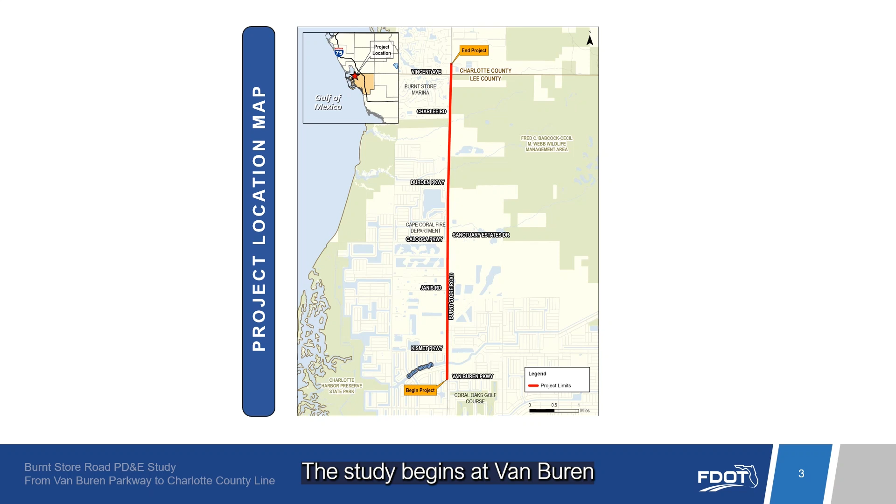The study begins at Van Buren Parkway and extends to the Charlotte County line. The study also includes a quarter mile section north of the Charlotte County line to connect to the existing 4-lane roadway. The total project length is approximately 5.7 miles.

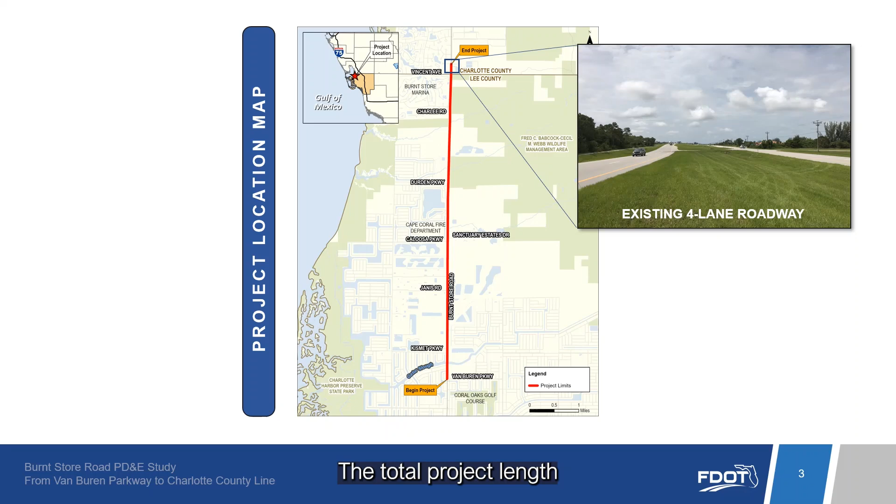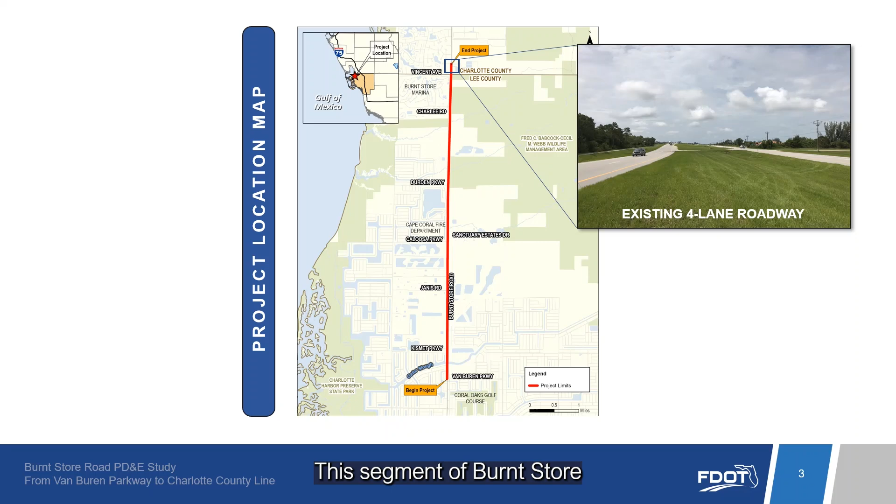A portion of the roadway is within the city of Cape Coral, while the remainder is located within unincorporated Lee County. The department proposes to widen Burnt Store Road from 2 to 4 lanes, with future accommodation of 6 lanes. This segment of Burnt Store Road is the last remaining 2-lane unimproved segment of the roadway's 18-mile length from Pine Island Road to US 41.

Burnt Store Road, also known as County Road 765, serves as an important north-south corridor for commuters, in addition to freight traffic, as it connects to regional transportation facilities. These include Interstate 75, US 41, and Pine Island Road. The corridor also provides access to several developments within Lee and Charlotte counties, including Burnt Store Marina.

Widening Burnt Store Road will address projected travel demand as a result of area-wide growth. In addition, the proposed widening and associated multimodal improvements will address safety concerns associated with the existing 2-lane roadway and enhance emergency evacuation for this designated hurricane evacuation route.

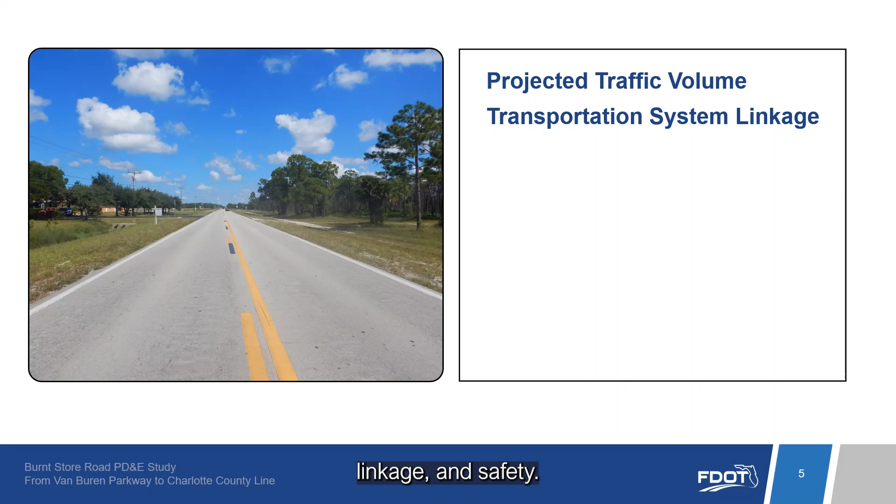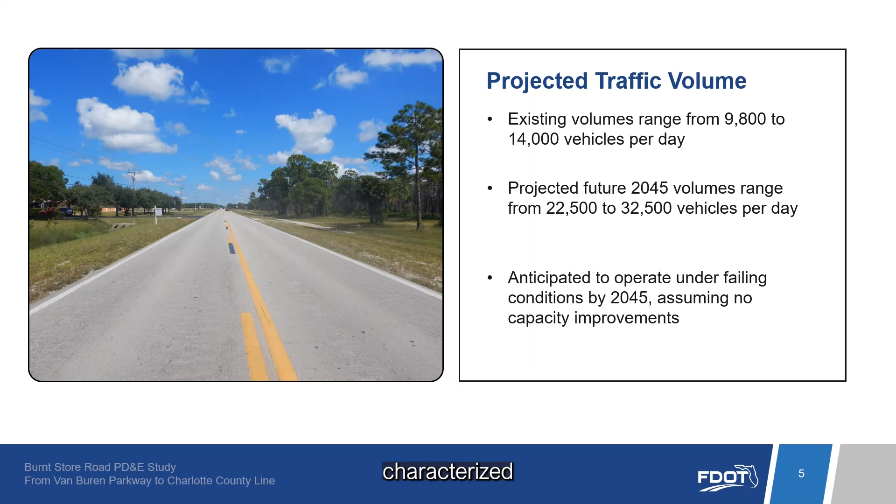The need for the proposed improvements for Burnt Store Road is based on traffic volume projections, transportation system linkage, and safety. Existing traffic volumes range from 9,800 to 14,000 vehicles per day. Based on anticipated growth within the corridor, projected future 2045 traffic volumes range from 22,500 to 32,500 vehicles per day. By the 2045 design year, if no roadway capacity improvements are made, the corridor is anticipated to operate at a level of service F. This signifies a failing condition characterized by high level of traffic congestion and delays.

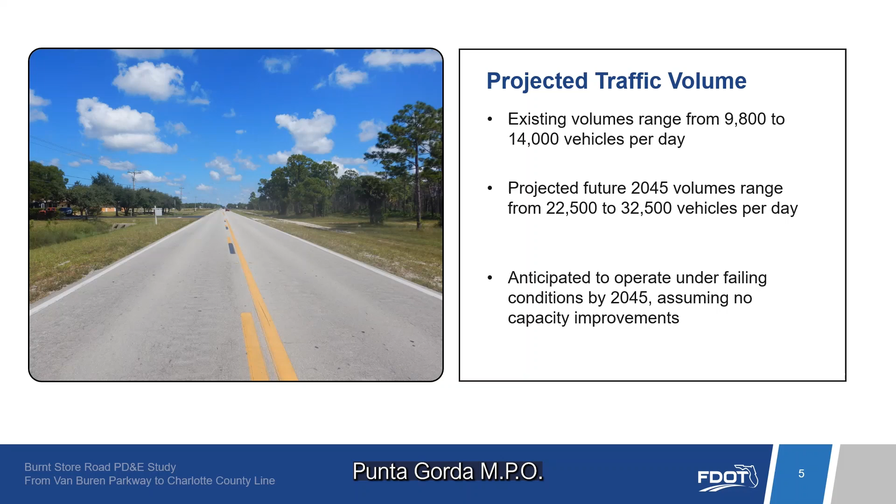At this time, this project is listed as cost feasible in 2031 to 2035 in the Lee County Metropolitan Planning Organization, or MPO 2045, Long-Range Transportation Plan, or LRTP. Similarly, the project from the Charlotte County line to Wallaby Lane in Charlotte County is listed as cost feasible in 2031 to 2035 in the Charlotte County Punta Gorda MPO 2045 LRTP.

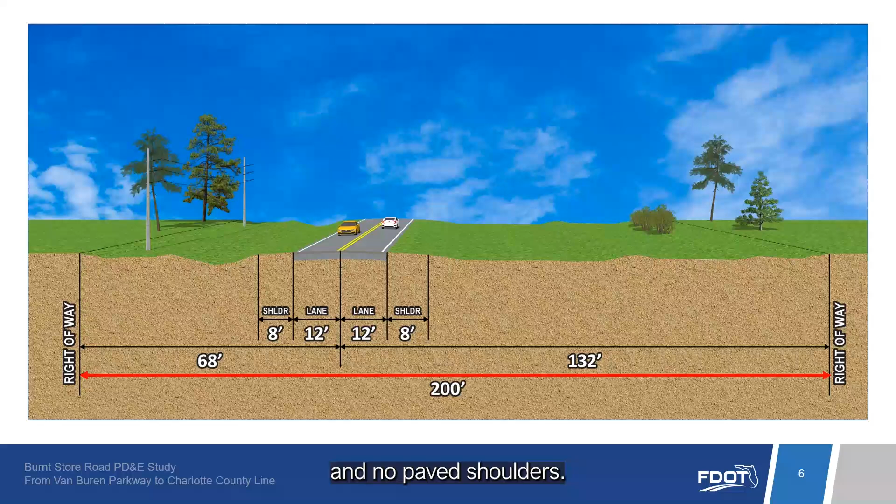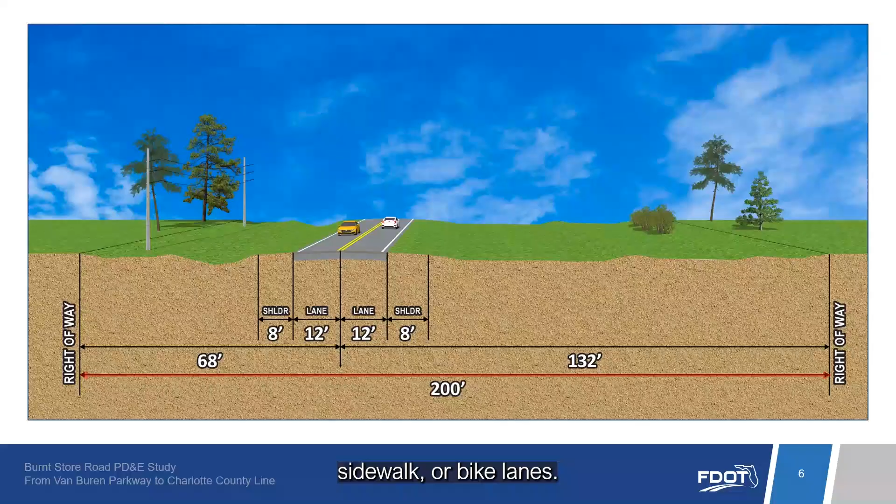Within the project limits, Burnt Store Road is a 2-lane undivided facility with 12-foot travel lanes, 1 in each direction, and no paved shoulders. There are no pedestrian or bicycle facilities within the project limits, with the exception of the south and north ends, where adjacent projects added some shared use path, sidewalk, or bike lanes. The posted speed limit is 55 miles per hour.

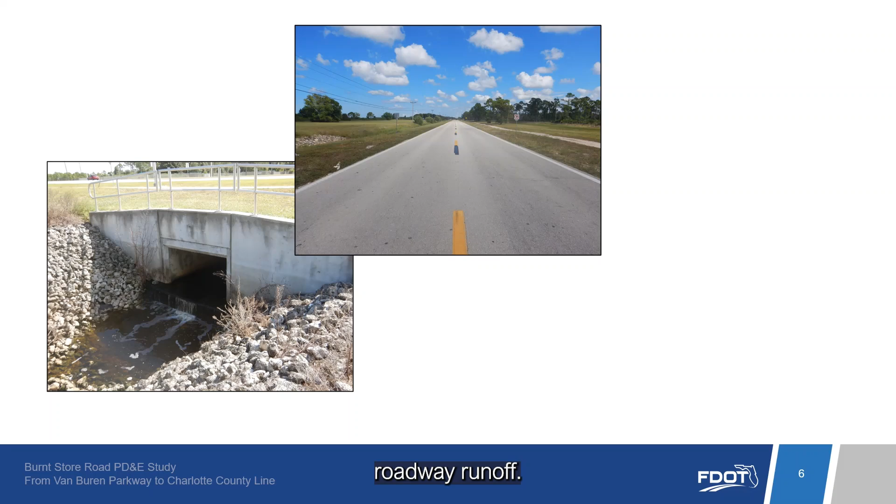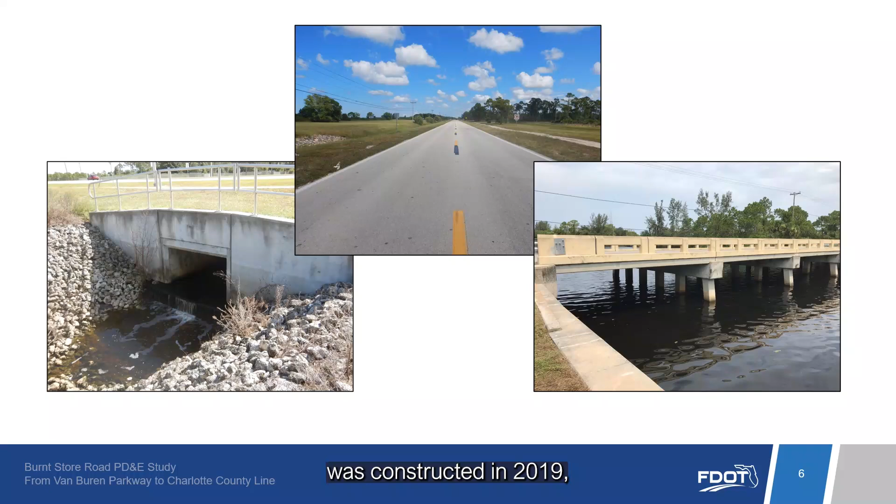Stormwater runoff is collected in roadside ditches and swales, and there are no existing stormwater management facilities to store and treat roadway runoff. There are 2 bridges over Gator Slough Canal. The existing southbound bridge originally carried both northbound and southbound traffic. A new northbound bridge was constructed in 2019, and the original bridge was transitioned to carry 2 lanes of southbound traffic. The southbound bridge has 2 11-foot travel lanes with 9-foot shoulders on each side.

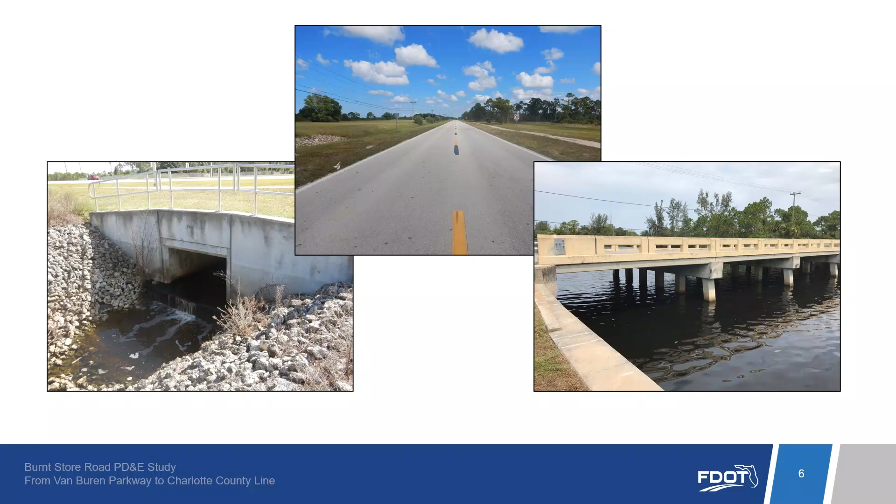Throughout this PD&E study process, FDOT has looked at many different concepts to widen Burnt Store Road from 2 to 4 lanes. After environmental and engineering analyses and public and agency comments, many of these alternatives were eliminated.

The last public meeting was an alternatives public workshop held on August 30th, 2022 for the in-person option, and on September 1st, 2022 for the virtual option. At that workshop, we asked for your input on proposed improvements to Burnt Store Road. Some of the feedback received included access management concerns and the restriction of northbound turning movements from Burnt Store Marina and Vincent Avenue in particular, access management at other existing project intersections, future development access, turn lanes, and environmental impacts.

Based on your comments and additional environmental and engineering analyses, a preferred alternative was selected for Burnt Store Road.

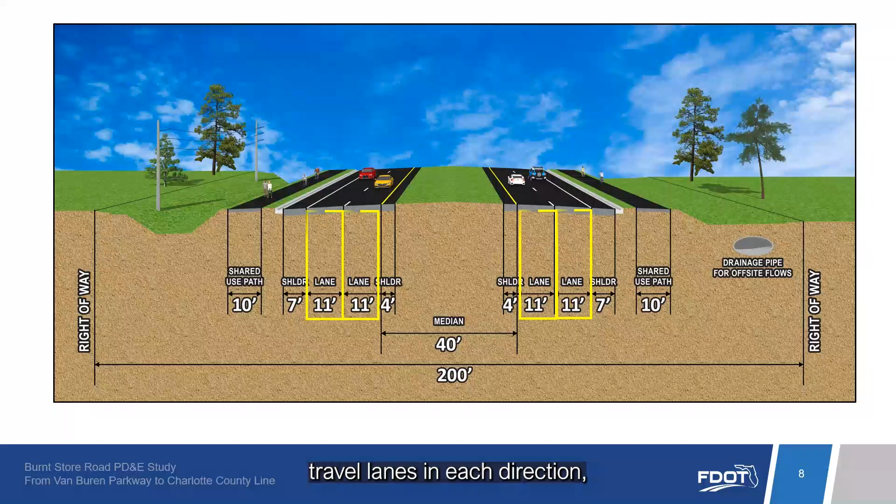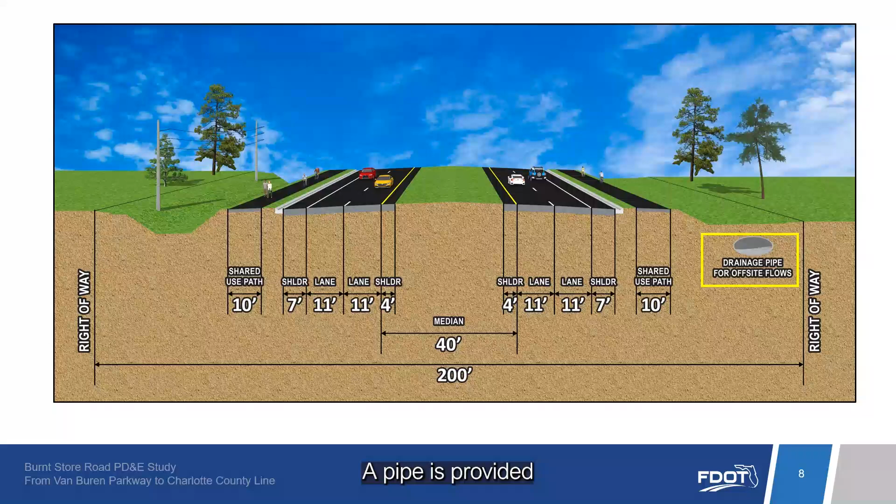The preferred alternative for Burnt Store Road results in 4 lanes with 2 11-foot travel lanes in each direction, as well as 4-foot paved inside shoulders, 7-foot paved outside shoulders, and a 40-foot grass median and 10-foot shared use paths on each side of the roadway. This alternative provides an urban typical section with curb and gutter and a closed roadway drainage system. A pipe is provided to capture offsite flows from the east and convey the water under the roadway.

This alternative nearly eliminates right-of-way impacts for the roadway alignment. One unavoidable roadway impact would occur at a utility parcel just north of the Lee County line. Right-of-way is also needed for the stormwater ponds and floodplain compensation areas.

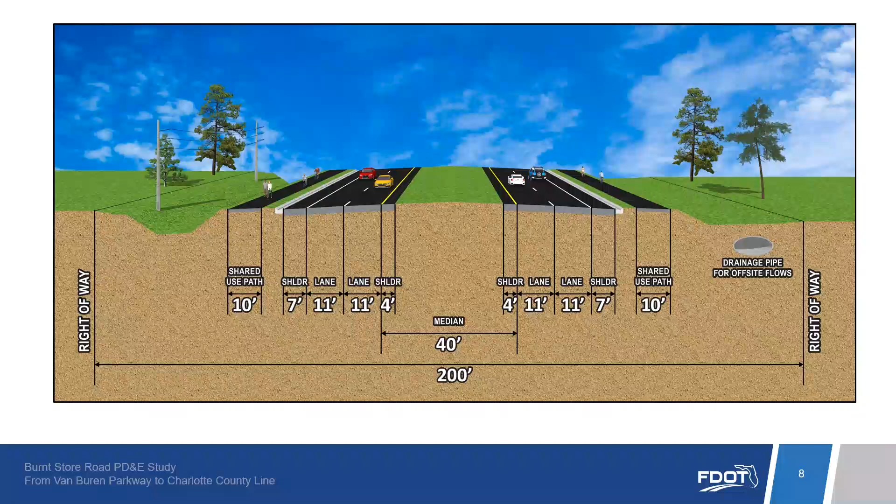Extensive engineering analysis was completed as well as coordination with Lee County, Charlotte County, and their MPOs regarding alternative intersection designs at Vincent Avenue. A continuous green T intersection was identified as the preferred intersection alternative in this location. This intersection type allows for eastbound traffic on Vincent Avenue to make a northbound, left-turning movement onto Burnt Store Road with signalization and a channelized lane to merge onto Burnt Store Road. A video further explaining how this intersection functions will play momentarily.

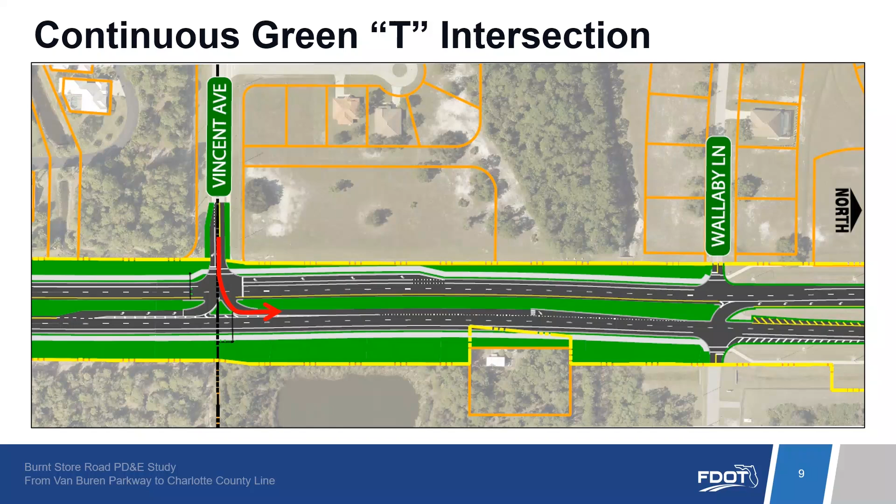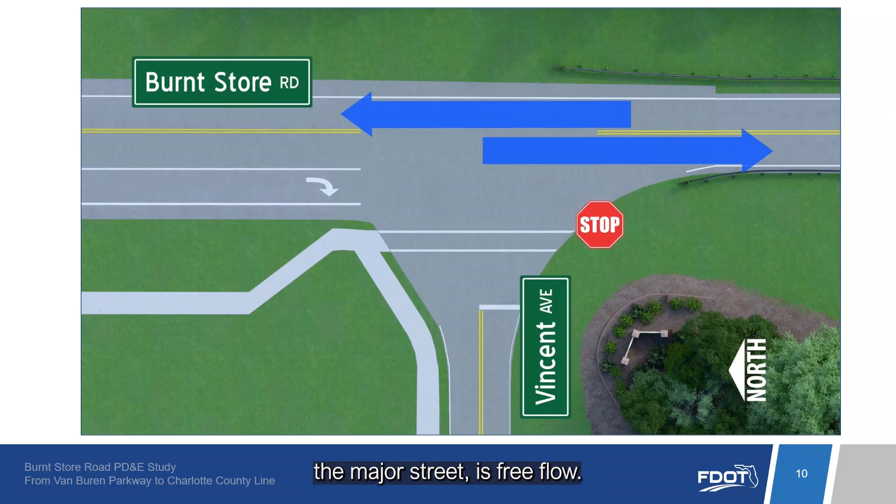The existing intersection at Burnt Store Road and Vincent Avenue is a 3-legged or T intersection. Vincent Avenue, the minor street, is controlled by a stop sign. Northbound and southbound traffic on Burnt Store Road, the major street, is free flow. Free flow conditions can create a lack of gaps in traffic needed for northbound traffic to turn left onto Vincent Avenue. In addition, the lack of left turn lanes, the presence of trucks and vehicles with trailers, and delays associated with turning vehicles create backups on both Burnt Store Road and Vincent Avenue. This also creates potential safety concerns.

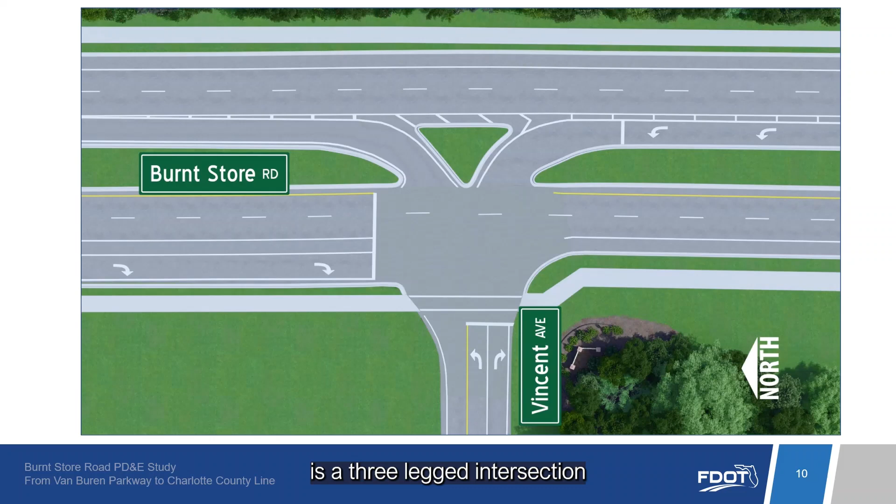The continuous green T intersection, or CGT, is a 3-legged intersection that allows one direction of travel on the major street to operate under free flow conditions. The opposite major street direction of travel and minor street approach are typically controlled by traffic signals.

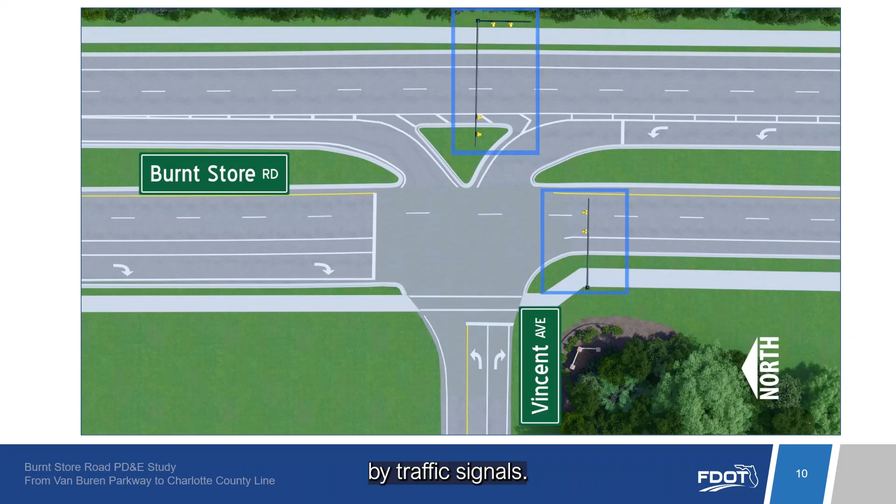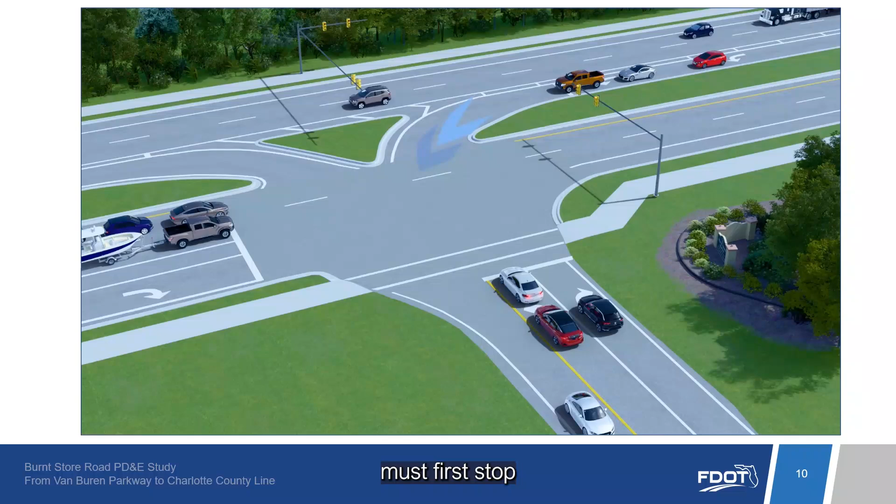Let's take a closer look at how a CGT would function for motorists at the intersection of Burnt Store Road and Vincent Avenue. On Burnt Store Road, northbound traffic would proceed through the Vincent Avenue intersection without stopping. Motorists who wish to turn left onto Vincent Avenue from this direction must first stop at the traffic signal before completing their movement. Southbound motorists on Burnt Store Road would have the options of proceeding straight as through traffic or turning right onto Vincent Avenue, just like at a conventional signalized T intersection.

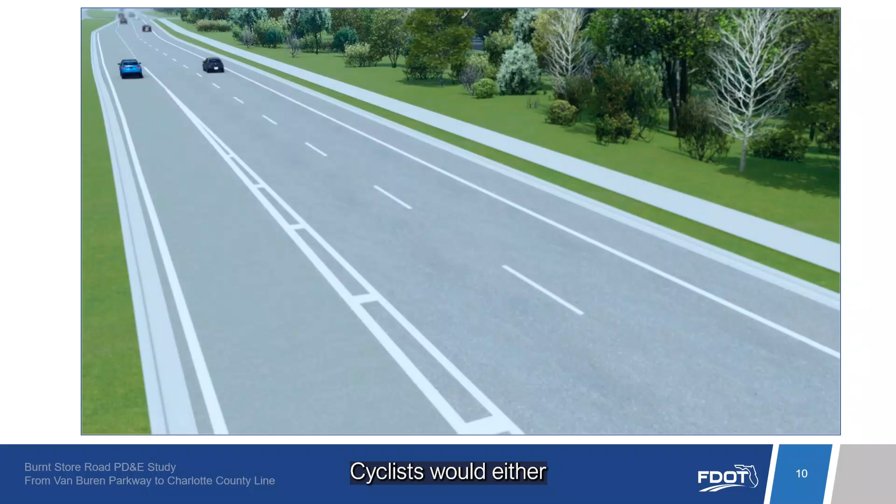From Vincent Avenue, motorists would use the right turn lane to proceed southbound on Burnt Store Road. To turn left onto Burnt Store Road, motorists would use the channelized lane on Burnt Store Road to merge after passing through the traffic signal. Cyclists would either navigate the intersection using crosswalks and pedestrian paths or could follow the same paths as vehicles. Pedestrians would use marked crosswalks to safely cross Vincent Avenue.

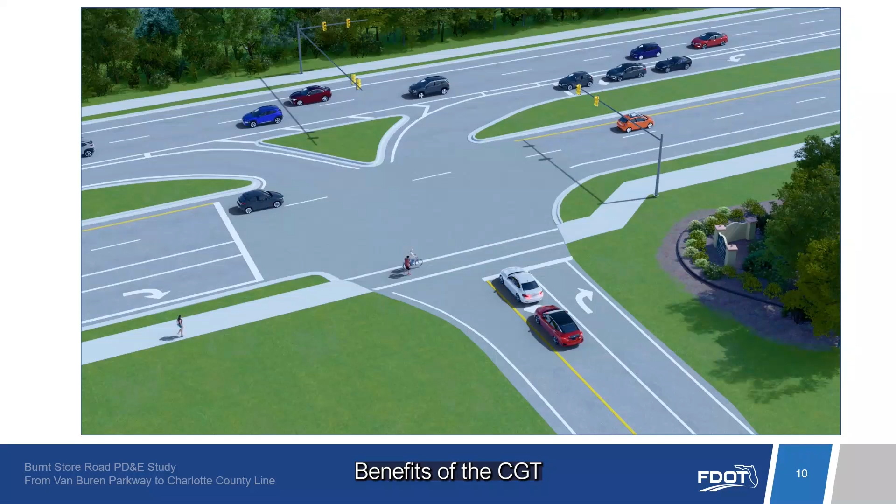Benefits of the CGT include improved efficiency and safety. The free flow of northbound traffic on Burnt Store Road allows more green light time to the other movements, reducing delay. Left-turning vehicles from Vincent Avenue would use a channelized receiving lane on Burnt Store Road to merge. The channelization of the left-turning vehicles from Vincent Avenue reduces the potential for angle crashes.

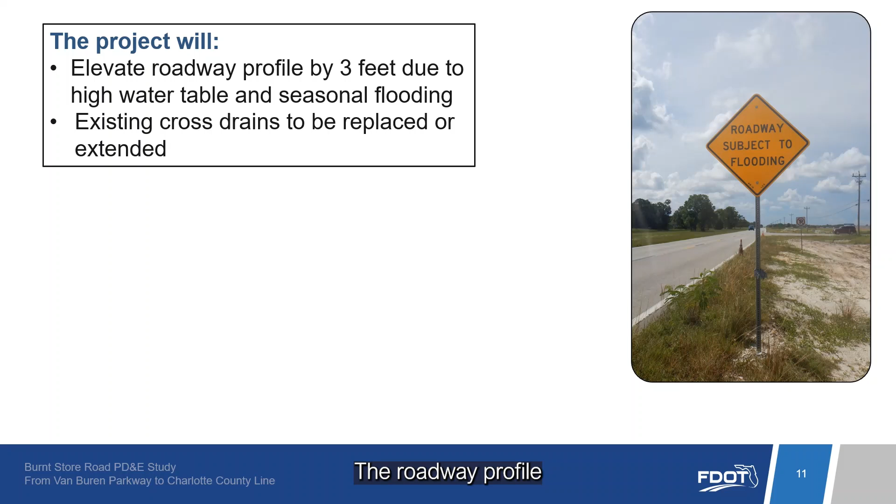The roadway profile will be elevated approximately 3 feet to account for the high water table in the area and a history of flooding events. The existing 9 cross drains, which include the bridge culvert over Yucca Pens Creek, will be extended or replaced. The culvert elevations and sizes will be appropriately designed to maintain the east to west hydrological flows of the area. A stormwater management system with stormwater ponds and floodplain compensation sites will be provided.

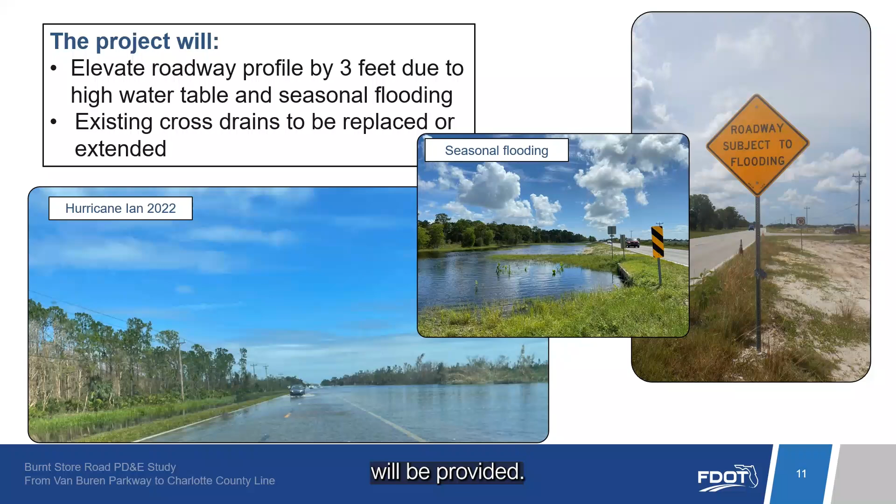This alternative also will replace the existing southbound bridge over Gator Slough Canal with a new bridge structure. The new bridge would be similar to the recently constructed northbound bridge with 11-foot travel lanes, 17-foot inside and 10-foot outside shoulders, and a 14-foot shared use path. The bridge will be of sufficient width to carry 3 lanes in the future.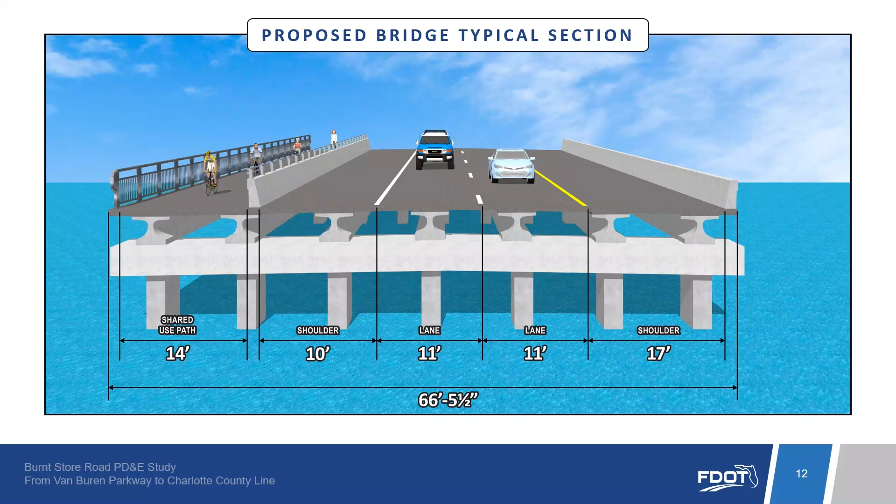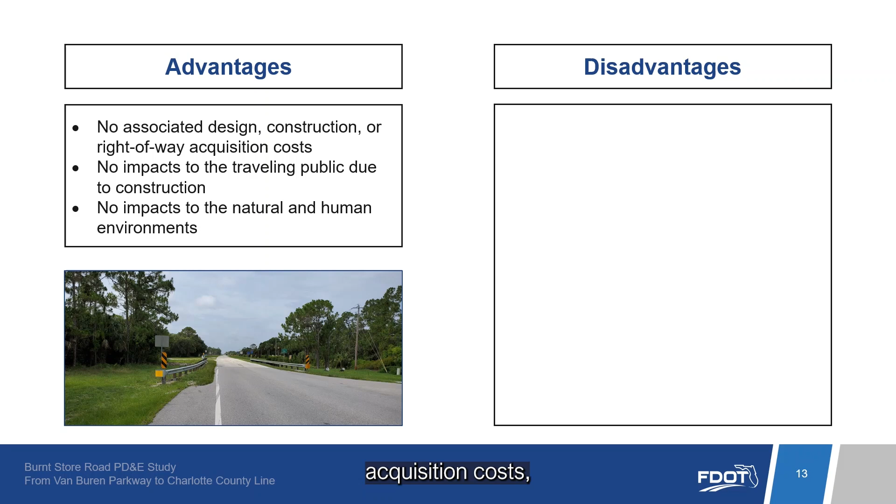Throughout this study, a no-build alternative is also considered. The no-build alternative assumes that no improvements are made to Burnt Store Road through the year 2045, except for routine maintenance. There are advantages and disadvantages to the no-build alternative. Advantages include no associated design, construction, or right-of-way acquisition costs, no impacts to the traveling public due to construction, and no impacts to the natural and human environments.

Disadvantages include inconsistency with the purpose and need for the project or with local transportation plans, lack of improved multimodal accommodations for bicycles and pedestrians, increased traffic congestion along the corridor, increased potential for crashes due to congestion and intersections, increased evacuation and emergency vehicle response times, and increased vehicle emission pollutants due to higher levels of traffic congestion. The no-build alternative remains a valid option and will continue to be evaluated until the completion of this study.

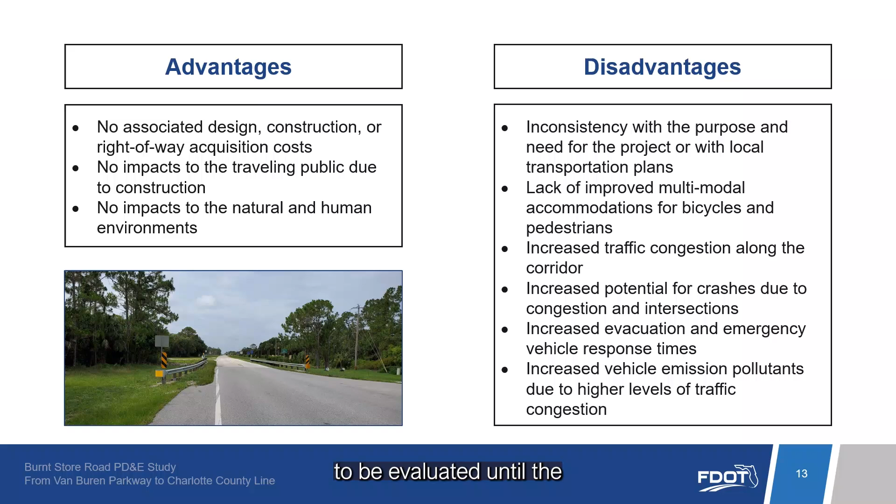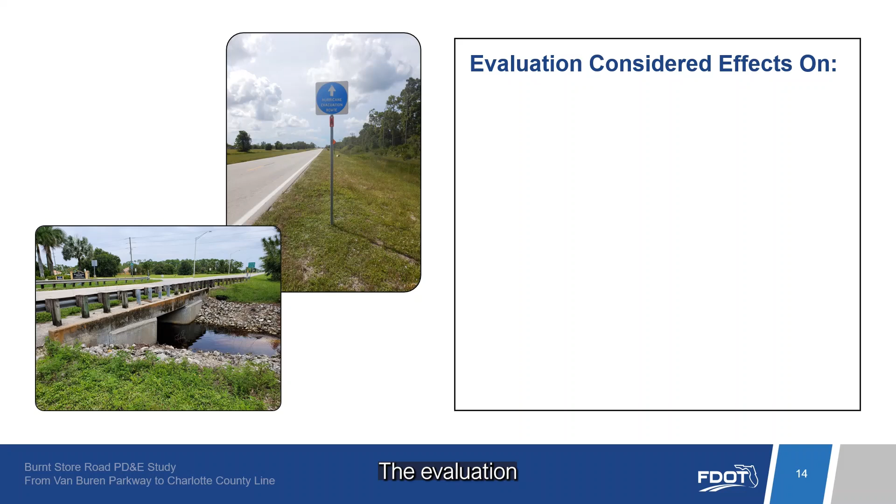FDOT evaluated environmental and socioeconomic factors relating to proposed widening improvements in accordance with the National Environmental Policy Act of 1969, as amended, and other federal requirements. The evaluation considered the effects of widening Burnt Store Road on protected species and habitat, wetlands and floodplains, water quality, stormwater management and permitting, air quality, right-of-way requirements and relocations, contamination, archaeological and historical resources, recreational sites, noise, and farmland.

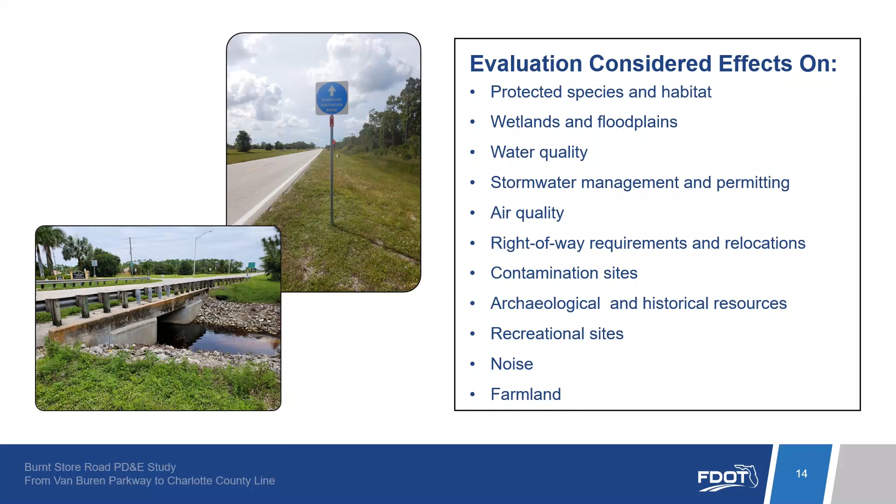Protected species and habitats are allowed special protection under the Endangered Species Act of 1973, as amended, and Florida statutes. FDOT assessed species within the project limits and, through ongoing coordination with the U.S. Fish and Wildlife Service, has determined that the proposed project may affect, but is not likely to adversely affect, the existence of certain federally listed threatened or endangered species.

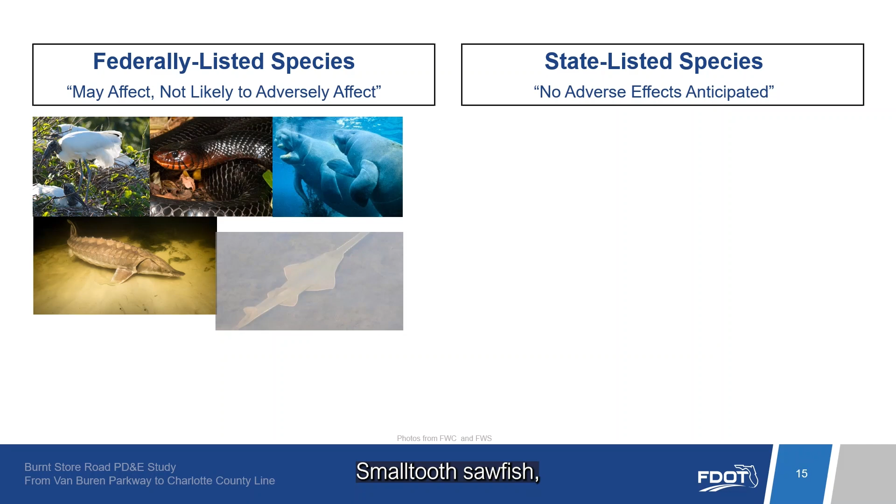The listed species include the wood stork, eastern indigo snake, West Indian manatee, Gulf sturgeon, small-tooth sawfish, and Florida bonneted bat. The FDOT also determined that the project will have no adverse modification or destruction of critical habitat for the small-tooth sawfish, West Indian manatee, and Florida bonneted bat.

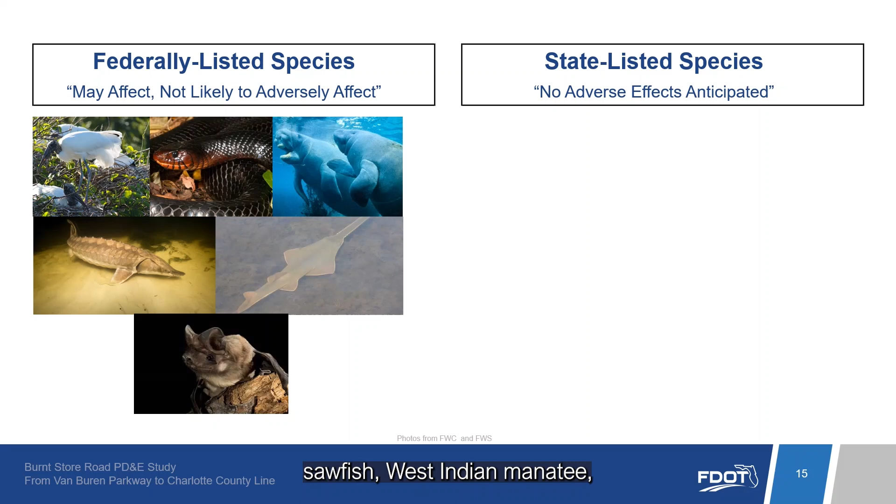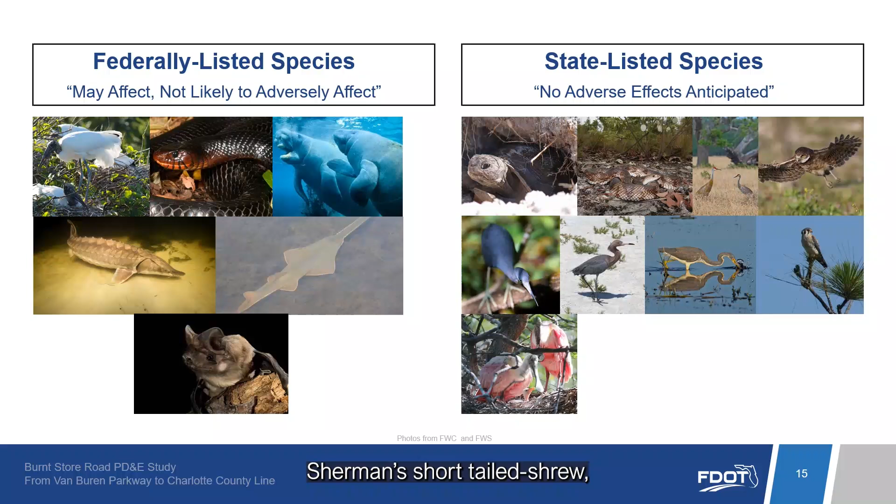In addition, the project will have no adverse effect anticipated on the following state-listed threatened or endangered species: gopher tortoise, Florida pine snake, Florida sandhill crane, Florida burrowing owl, little blue heron, reddish egret, tricolored heron, southeastern American kestrel, roseate spoonbill, Sherman's short-tailed shrew, Florida beargrass, and many-flowered grass pink.

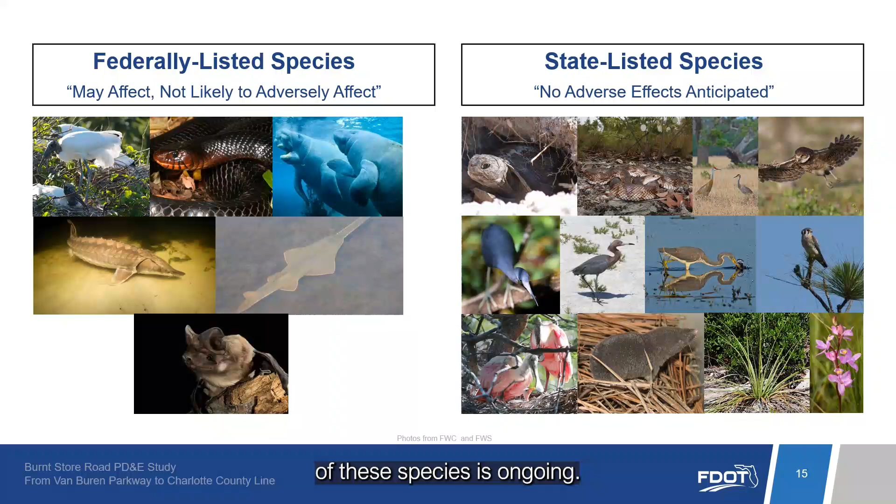Coordination with the National Marine Fisheries Service regarding the final status of these species is ongoing. Consultation with the U.S. Fish and Wildlife Service was completed on February 14, 2023. If the preferred alternative is approved by the Office of Environmental Management, FDOT District 1 will continue to work closely with environmental agencies in future phases, such as design and construction, to meet all environmental permitting requirements.

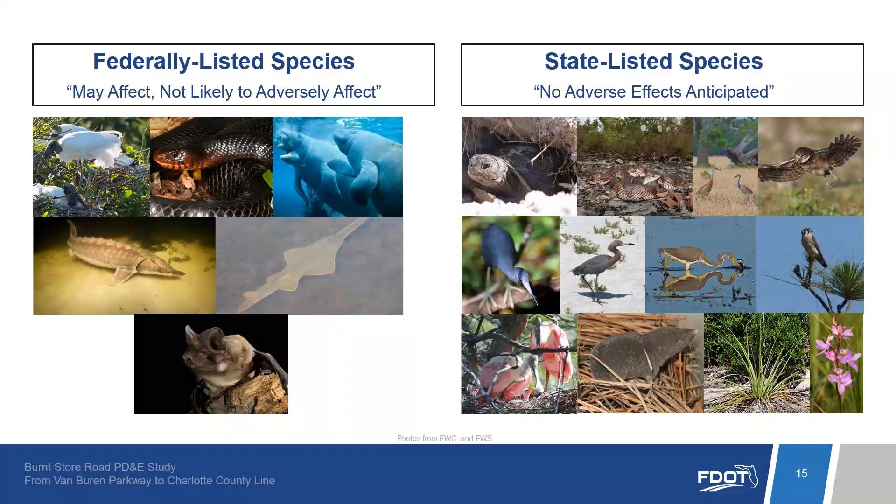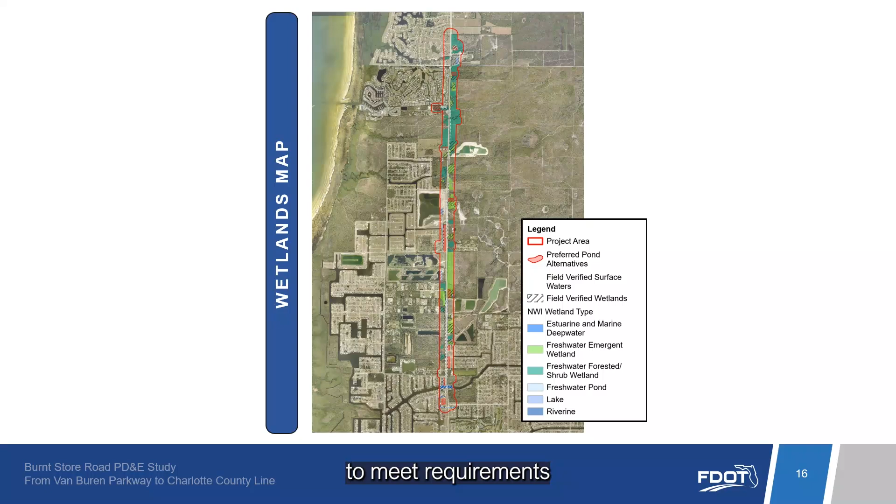FDOT evaluated wetlands within the project limits in accordance with Executive Order 11990, Protection of Wetlands. The proposed improvements will affect approximately 13.8 acres of wetlands, 0.02 acres of surface waters, and 19.64 acres of other surface waters. The Department will take all practicable measures to minimize harm to this area. The Department will mitigate wetland impacts resulting from this project's construction to meet requirements of Florida statutes and the United States Code.

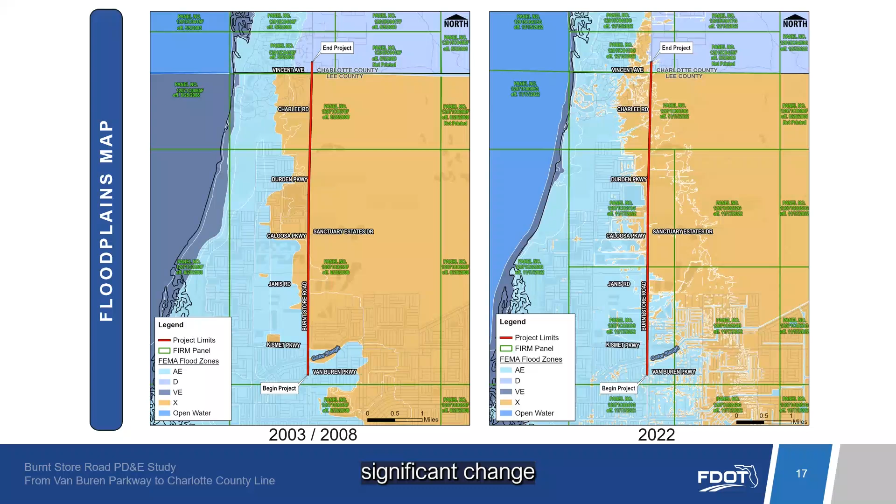The project has been evaluated for potential floodplain involvement in accordance with Executive Order 11988, Floodplain Management. There is no significant change in flood risk, nor is there significant change in the potential for interruption or termination of emergency services or emergency evacuation routes due to flooding.

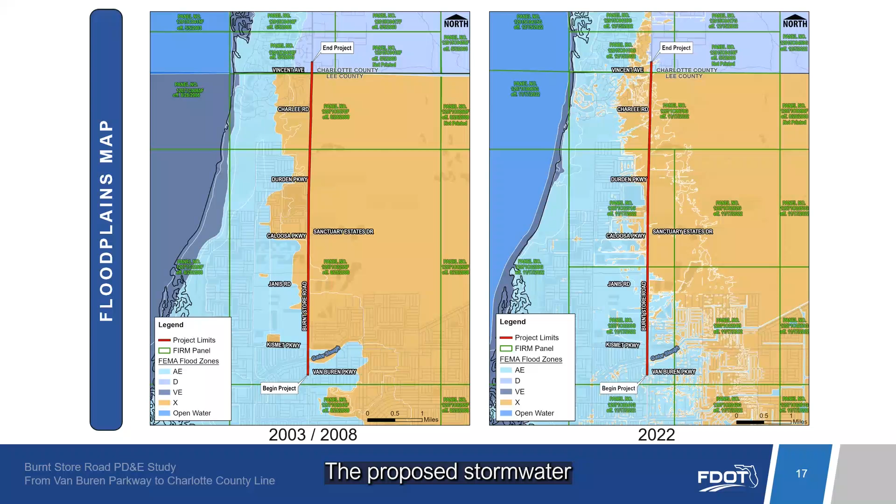A water quality impact evaluation was performed. The proposed stormwater management facilities will be designed in accordance with the current requirements of the South Florida Water Management District.

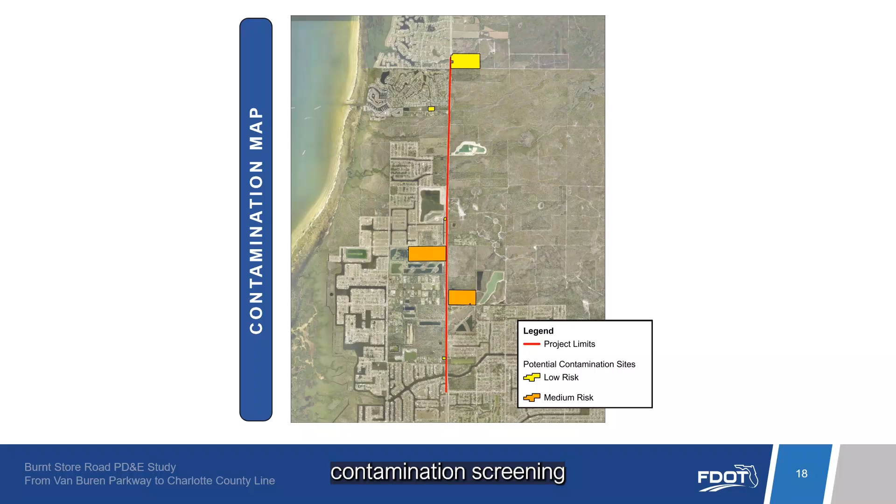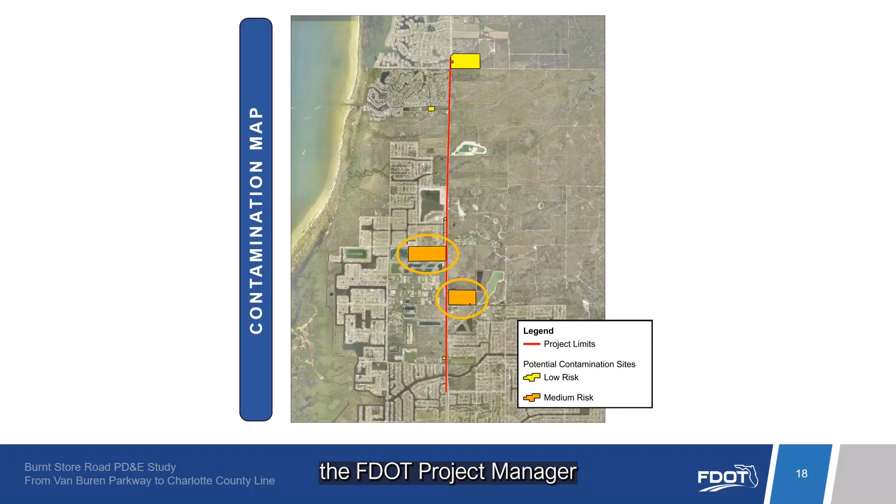Results of the environmental contamination screening showed that 2 sites were ranked medium risk and 4 sites were ranked low risk for potential contamination involvement with the project. For the sites that are ranked low for contamination, no further action is required at this time. For the sites with a risk ranking of medium, the FDOT project manager and the district contamination impact coordinator will coordinate on further actions during the design phase that must be taken to address contamination issues. Before construction, specially trained crews will address contamination in these areas as required. Locations of these sites are shown in the concept plans on display tonight.

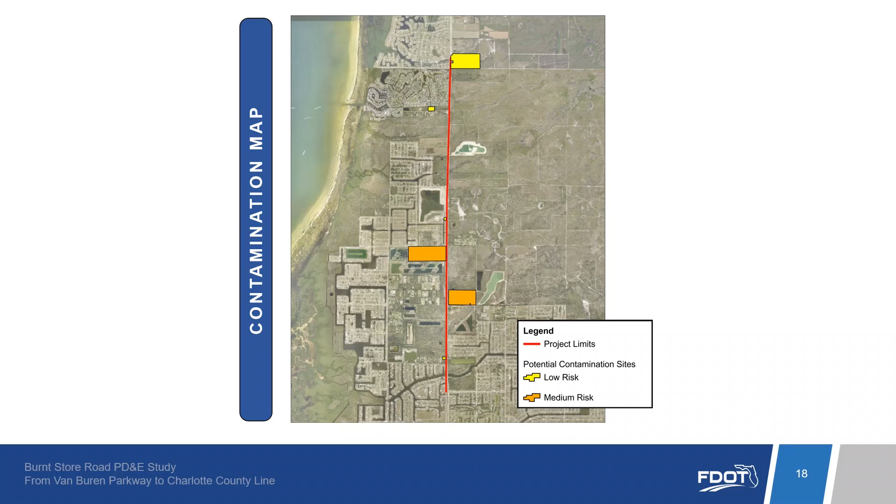The project is located in an area which is designated attainment for all the national ambient air quality standards under the criteria provided in the Clean Air Act. Therefore, the Clean Air Act conformity requirements do not apply to this project, and no significant impact is expected on air quality. This project is expected to improve traffic flow by adding capacity to relieve congestion, which should reduce operational greenhouse gas emissions. Minimal, short-term air quality effects may be caused from construction of the proposed improvements, such as dust from earthwork or unpaved roads and smoke from open burning.

The FDOT will adhere to all state and local regulations and to the standard specifications for road and bridge construction.

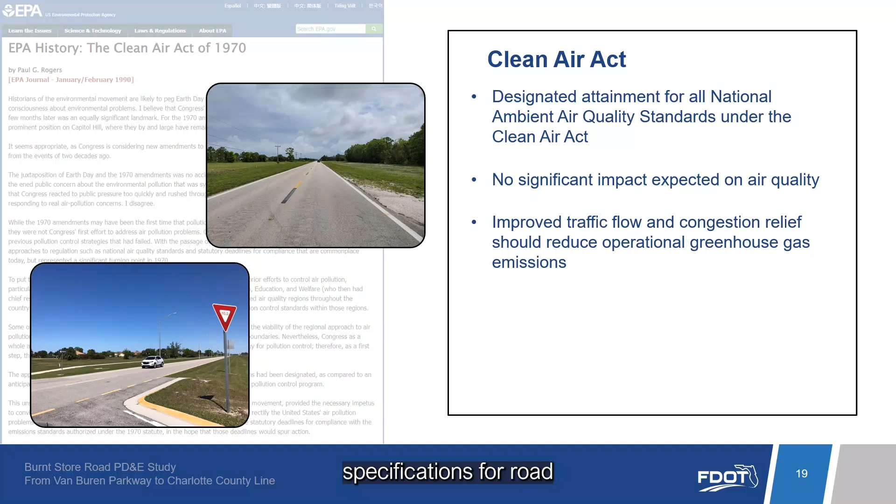The study team evaluated effects of traffic noise associated with the proposed improvements consistent with requirements outlined in Title 23, Code of Federal Regulations, Part 772, Procedures for Abatement of Highway Traffic Noise and Construction Noise, and with the FDOT PD&E Manual. Noise-sensitive sites along the project corridor may hear traffic noise levels that approach or exceed noise abatement criteria established by the Federal Highway Administration. While traffic noise abatement was considered as part of the project, no feasible and reasonable measures were identified that can be implemented to abate traffic noise at 5 locations along the corridor.

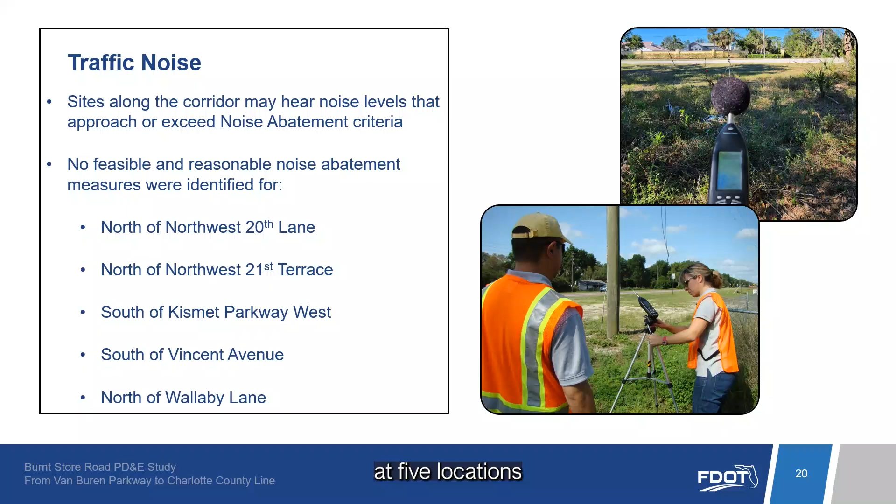The project team examined the project area for publicly owned properties that may be affected under Section 4F of the Department of Transportation Act of 1966. The Babcock Webb Wildlife Management Area, Yucca Pens Unit, Yucca Pens Preserve, Charlotte Harbor Preserve State Park, and Charlotte Harbor Buffer Preserve are Section 4F resources.

These 4 resources meet the conditions of a no Section 4F use, since the project has no permanent acquisition of land from these Section 4F properties, no temporary occupancies of land that are adverse in terms of the statute's preservation purpose, and no proximity impacts which significantly impair the protected functions of the properties.

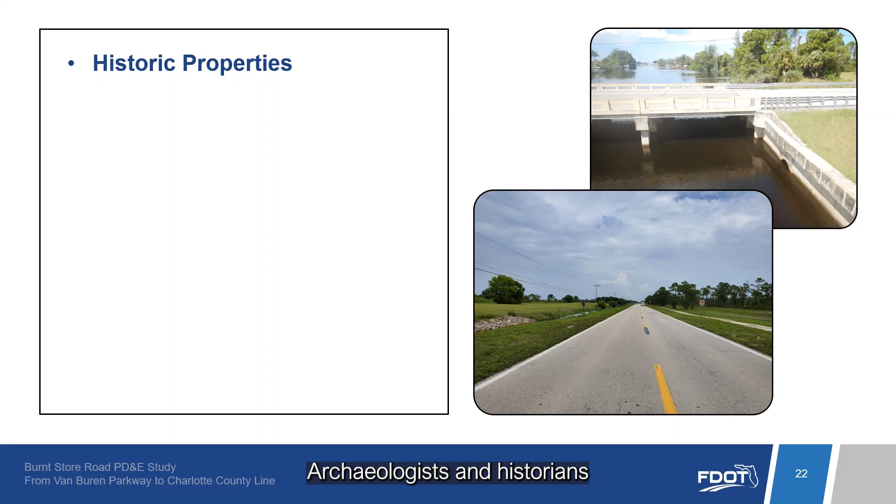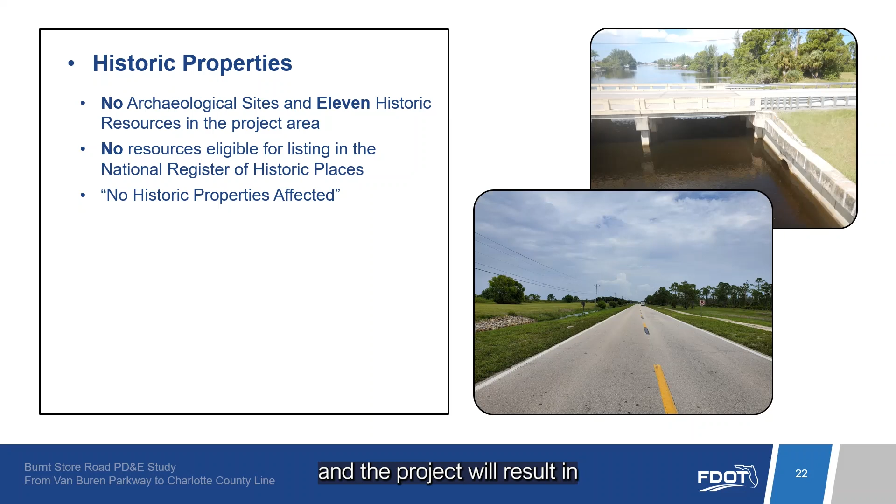A Cultural Resources Assessment Survey was conducted in accordance with the National Historic Preservation Act of 1966 and Florida statutes. Archaeologists and historians identified 0 archaeological sites and 11 historic resources in the project area. No resources are eligible for listing in the National Register of Historic Places. The State Historic Preservation Officer concurred with this determination, and the project will result in no historic properties affected.

As determined by the Natural Resources Conservation Service under the U.S. Department of Agriculture (USDA), the preferred alternative impacts approximately 11.4 acres of farmlands of prime or unique importance. Due to the project effects being below the significance threshold, no further consideration of protection is needed. No additional corridors need to be evaluated, and no additional coordination with the Natural Resources Conservation Service is required.

This project is not expected to change future land use patterns on Burnt Store Road. Minimal construction effects are expected. This project will not cause any relocation of families or businesses.

All right-of-way acquisition will be conducted in accordance with Florida Statute 339.09 and the Federal Uniform Relocation Assistance and Real Property Acquisition Act of 1970, commonly known as the Uniform Act. The right-of-way specialists supervising this program are here tonight and will be happy to answer your questions.

An evaluation matrix showing a detailed comparison of the preferred alternative and the no-build alternative is provided in the project handout and is also on display here this evening. The matrix shows potential effects to the social, cultural, natural, and physical environments and identifies preliminary costs.

The estimated costs to widen Burnt Store Road from Van Buren Parkway to the Charlotte County line includes $13.4 million for final design, $2.5 million for mitigation, and $26.5 million for right-of-way acquisition for roadway and stormwater management areas. The total estimated construction cost is $134 million. The cost for construction engineering and inspection is estimated at $13.4 million. The department's preliminary estimate of total project cost is $189.9 million.

At this time, the design phase is currently funded in FDOT's adopted 5-year work program. The department anticipates completion of this PD&E study by mid-2025. The study schedule is on display this evening.